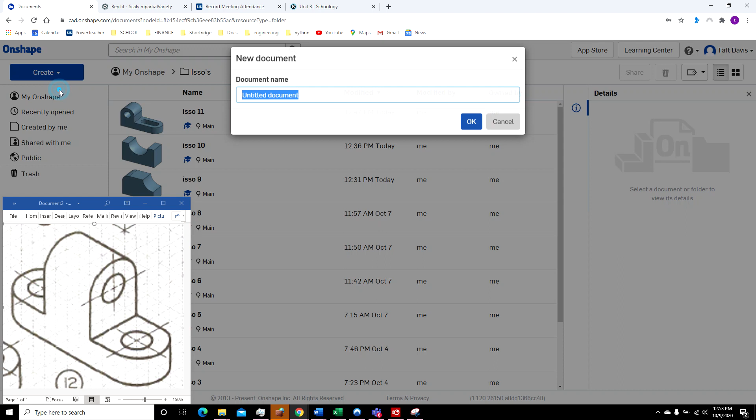All right, now we're going to look at ISO shape 12. I'm already in my ISOs folder, so I'm going to create a document. I'll call this one ISO 12. Now there's different ways we can do this, but I'm going to use the mirror tool on this one. So what I'm going to do is I'm going to make half of it and then mirror it. Not sure if it saves us a whole lot on this one, but I do want you to see how to use the mirror tool.

So if I'm looking at the front here, this is 2 inches high. Then it comes over 1, 2, 3, 4 inches. Then goes up 1, 2, 3, 4, 5 inches. And this is 1, 2, 3, 4 inches. Okay, so it goes up 2, over 4, and then up 5. Okay.

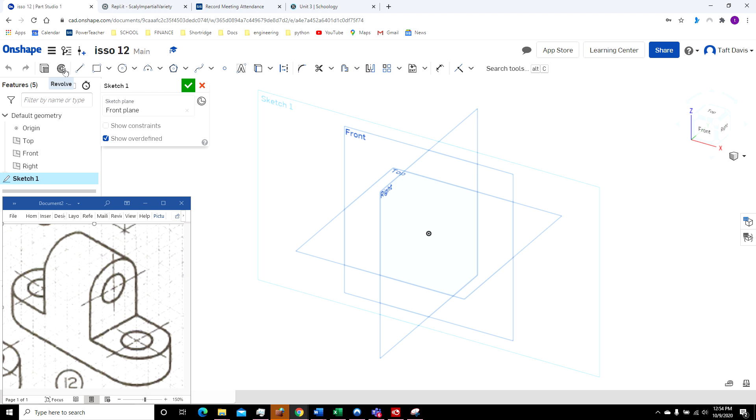I'll click on the front. I'll click sketch. Just going to hide those. I'm going to click front view. Use my line tool. Left click again. Type in 2.

Now in this part, I'm going to come over 1, 2, 3, 4. And then you've got 1, 2, 3, 4, but I'm just going to come over 2 inches there. So you got the 4 plus another 2 is going to be 6 inches. I'll type in 6. Then I'm going to go up 7.

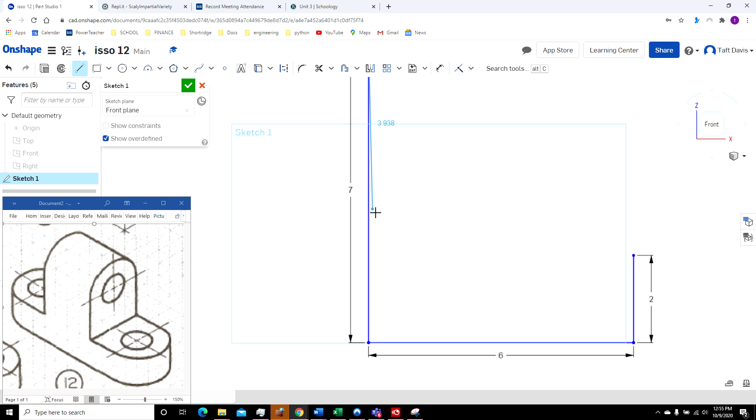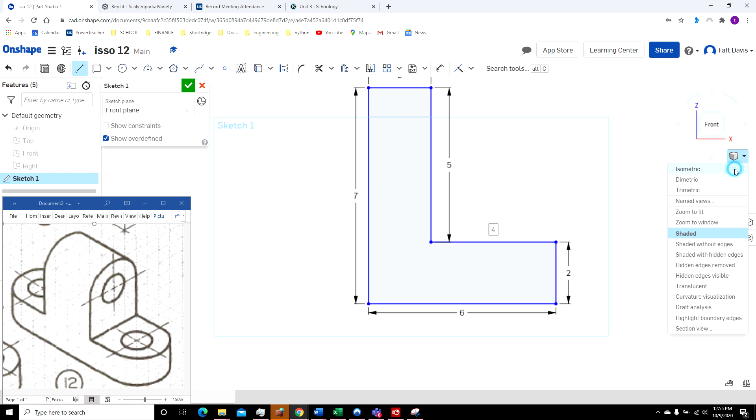And I'm coming over 2 because again I'm going half the distance of that top. Then I'm going to come down 5. And then come back over and connect on this corner. Okay, so I've done this L shape right here, which is half of the shape. I'm going to click on the isometric view. I want to extrude this 4 inches.

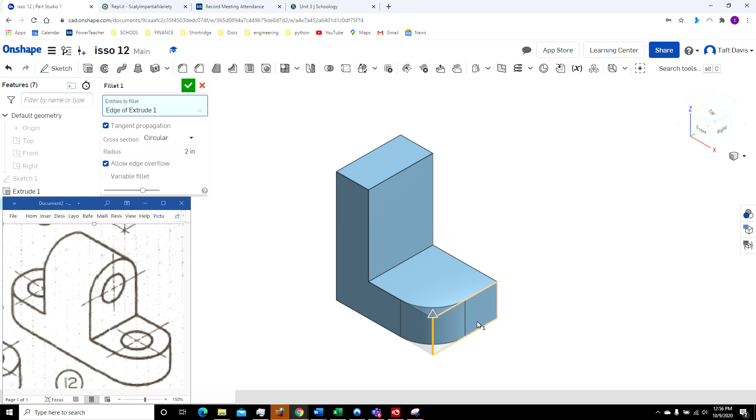All right, now I'm going to round off the top and round off this side over here. All right, this is 4 inches in diameter, which means this has a radius of 2. So I'm going to click on the fillet. Make that 2. Click on this corner and this corner. And this also has a diameter of 4, which means it's radius of 2, so I can use the same fillet up here.

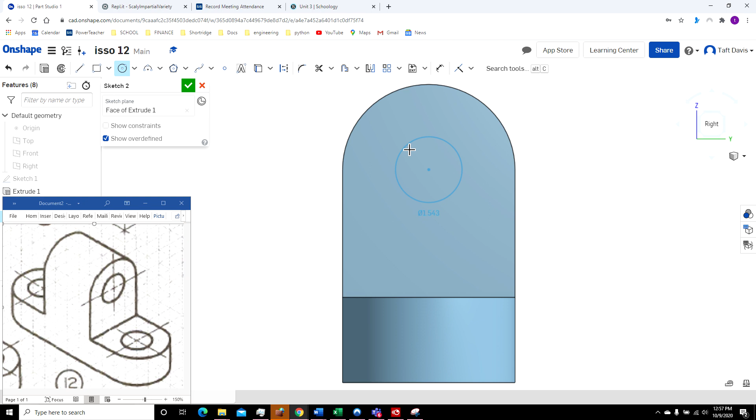Now I'm going to cut my 2 holes, and both of these have a diameter of 2 inches. So I'll just cut the top one first. So sketch, I'm going to click on the front right here. Actually, that's the right side. I'm going to do a circle with the center hole. I want to move around, find the center, drag out, and that's got a diameter of 2.

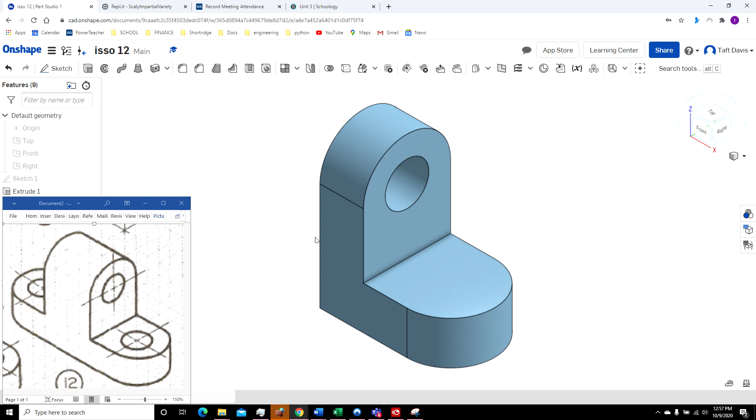I want to extrude that. Now with the isometric view, again, I want it to remove all the way through, and so I click. So I've got my hole all the way through there. So now I'm going to cut a hole through here. Click sketch. Again, I'm going to use the center circle. Look for the center right there. It's got a diameter of 2 inches.

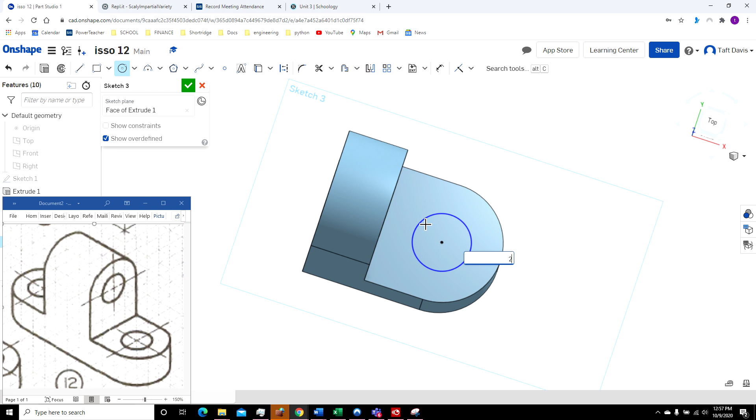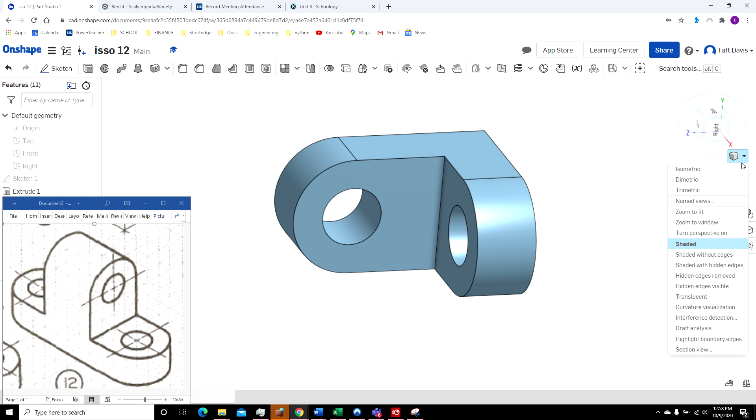Extrude. I want it to remove. And it's got to go at least 2 inches to get all the way through. So I'll just drag this down here. Click OK. All right, so I have half the shape. Now I can come up here where it says mirror. You've got the two sides that mirror each other.

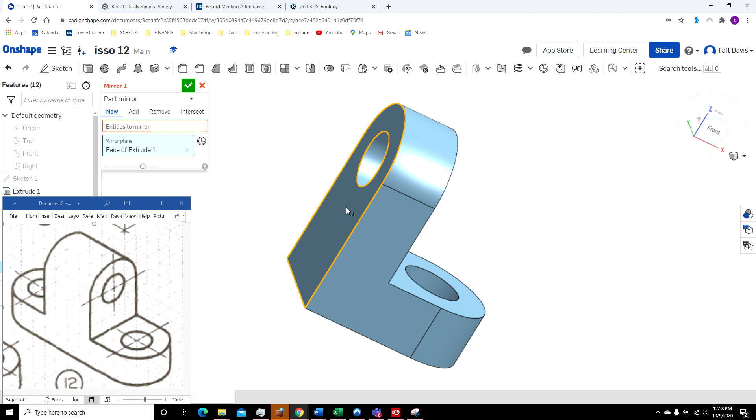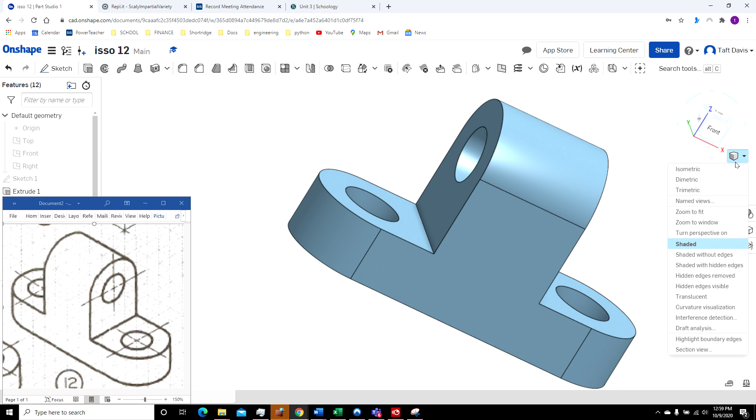Now I want to rotate this around just a little bit so I can see the back side because I want to mirror across this plane. So I'm going to click on mirror. I want to mirror the plane. Drag this over here. Click on isometric.

Okay, so let's look at the mirror one more time because I don't think I explained that very well because I kind of got lost in my clicks there for a second. So we come back around over here so we can see this side. I'm going to click on mirror. I'm going to click on the shape because that's what it's asking for. It's asking for the entity to mirror.

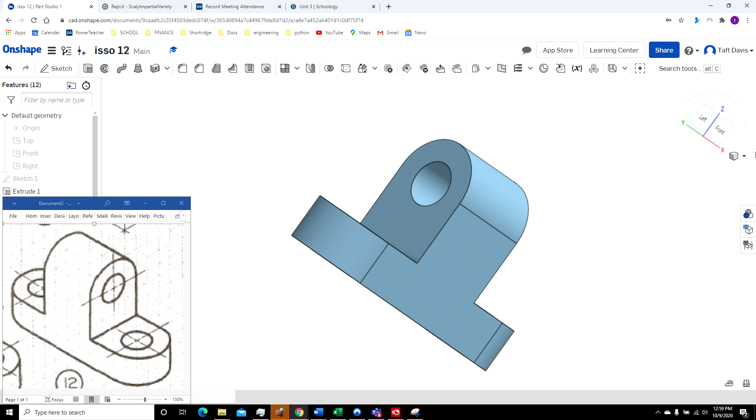We want it to mirror across the plane, so we're going to click on that. That highlights blue. I'm going to click on the plane. Click OK. And that's shape number 12.